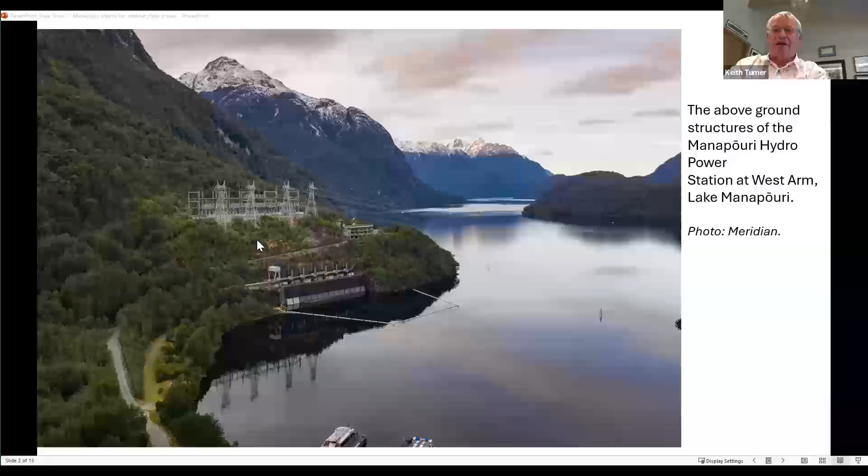Yeah, I've had a long association with Manapouri going right back to when I was 17. I took off from Rotorua to do a South Island trip in a 1948 Series E Morris 8, and luckily managed to cross the lake at Manapouri and visit the project under construction. One of the photos in the slide pack is a picture I took of the main intake structure being excavated.

That followed up with doing a practical period for my university degree at Canterbury in 1971-72, just after the final three machines were commissioned. The station was commissioned in two stages: Bechtel did the first four, and the second three were installed and commissioned by Wilkinson Davies. That was the time when the tunnel performance was discovered to be underperforming.

We couldn't run the station at its expected full load of 720 megawatts because the tailwater level rose too high for the anticipated back surge that might arise from a total station disconnect. So I was lucky to be there when Professor John Undrill was sent down to the station to revise all of the governor settings and establish the maximum rating for the station, which ultimately turned out to be 580 megawatts. I worked with John Undrill on those governor setting changes and got deeply involved in a lot of the calculations around the station performance.

Obviously at a tailwater level above 100 feet, the back surge was enough to flood the station. So this work was pretty important.

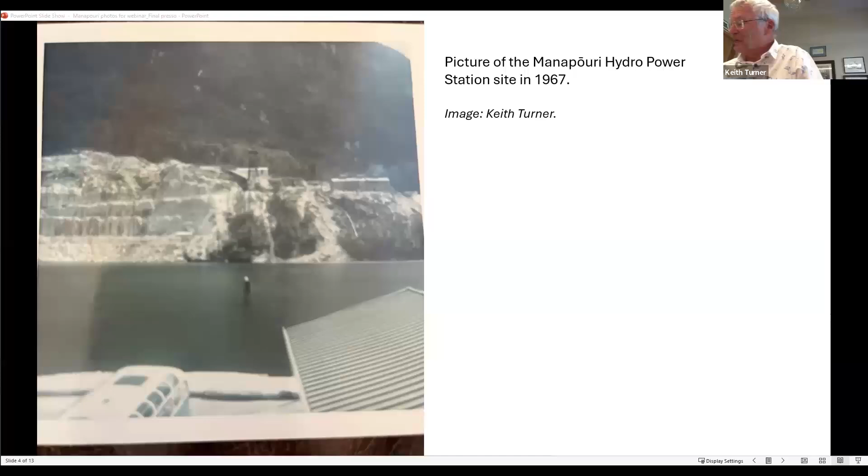In the end, I think it cost Meridian about $240 million against a contract sum of about $220 million. But I do know that the Fletcher-Dillingham-Ilbau consortium suffered a significant high cost from that project as well.

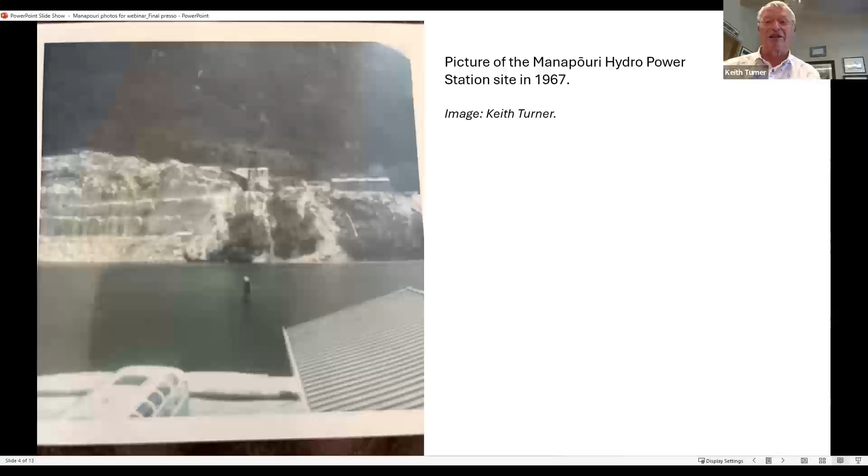We commissioned it in 2003, I think was the date. The picture in the pack of the TBM breaking through was a fantastic moment - I managed to be there, standing right beside the photographer when that photo was taken. It was great jubilation for the team to bring the project home.

And of course, that project, in its early days, because of the slow progress, we were thinking of abandoning it.

When we finished, that project was of enormous value to the power station and lifted its rating to above 800 megawatts. I'll let you into a wee secret and then I'll finish. Subsequent to the drilling of that second tunnel, we systematically went through and refurbished the generators and the turbines. The turbines were replaced by Hitachi back-angled intake runners.

A fantastic runner, very, very much quieter than the old Canadian runners that were there, but capable of 145 megawatts. So I said to my team before I finished at Meridian, that station must be capable of 1,000 megawatts. So I believe we actually got it up over 1,000 megawatts on a day when we had a very low spring tide, a very high lake, and we obtained a special discharge consent from Southland District Council for a period of 1 day. And I do believe that station got up over 1,000 megawatts for a brief period of 10 minutes.

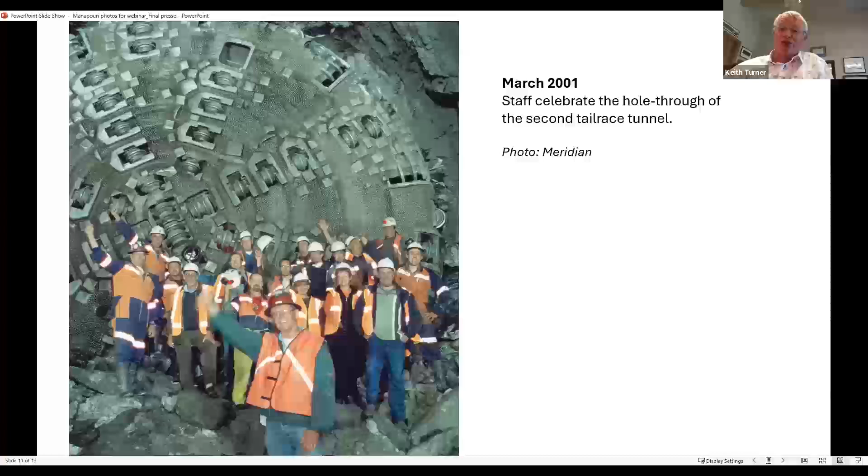To finish on real history, that project was originally conceived by a bunch of public works surveyors who were sent around the country in the late 1800s. So 1896, 97, 98 was one survey program, a second survey program in 1903-05. That scheme was observed and identified by those surveyors way back that far. So it took 70 years to bring that dream alive, but it has been a fantastic workhorse.

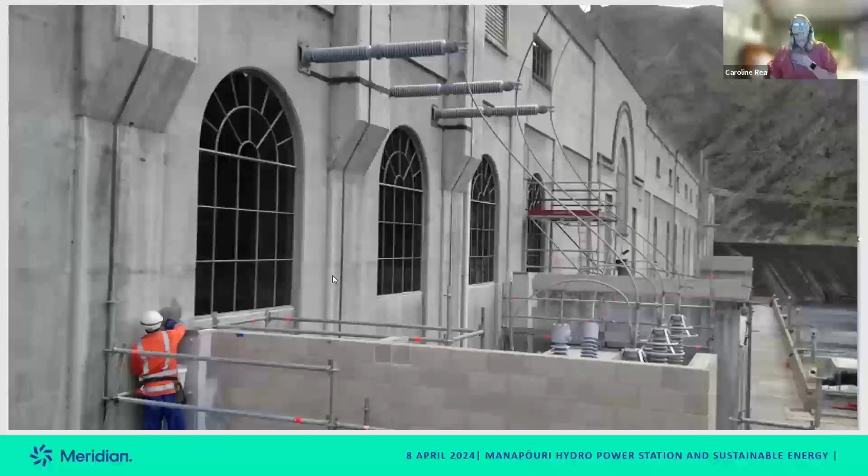I mitigated erosion of the sluice pier and tail race below the substation, improved fire protection around the transformers, enhanced uplift drainage under the dam, strengthened the retaining wall on the true left of the dam, and permanently removed the auxiliary generators.

One of my other little projects was to upgrade our beautiful wood-lined lift in the station. I then moved on to managing the refurbishment of hydro generating units at Ōhau Power Station, which kept me busy for another 3 years.

In 2022, Meridian set an ambitious target of 7 and 7 - one new generation project approved for construction every year for 7 years. In order to achieve this, Meridian decided to re-establish a renewable construction team, and I took the opportunity and joined the team as the civil engineering manager.

Our team now basically takes projects that have been secured and consented by our development team and takes them through detailed design and construction.

Meridian currently has 2 sites under construction: the 176 megawatt Harapaki wind farm in the Hawke's Bay. 3 of the 6 strings of turbines have been commissioned, and the remaining 3 strings are being progressively commissioned over the coming months. I just had to include that one - it was quite a pretty photo, I thought.

We are also building the first grid-scale battery storage system, or BESS, in Ruakaka, south of Whangarei, just down the road from the old Marsden Point refinery. This will be a 200 megawatt hour battery, consisting of 80 batteries housed in 20-foot shipping containers, and 20 power conversion systems.

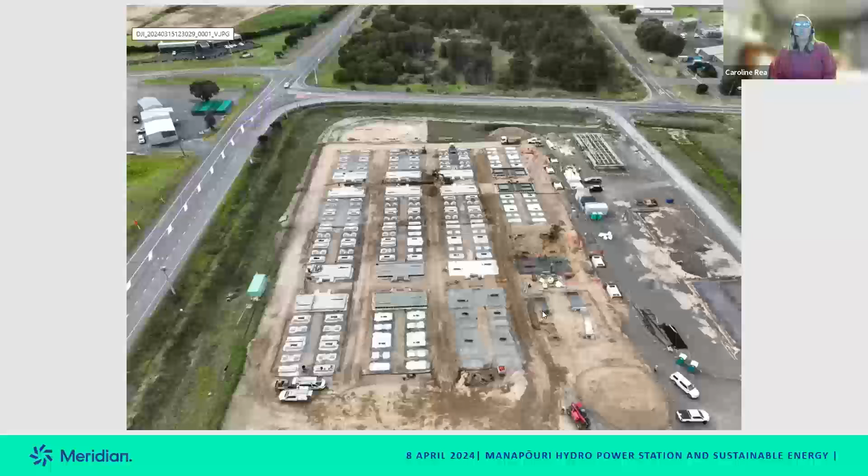Now the project is well under construction, as you can see in this photo, and the first of our shipping containers have arrived in the country.

We're also working on our first solar farm, which is adjacent to the BESS site, and this is going through resource consent. But my other major project I'm working on at the moment is the Te Rere Hau wind farm.

Meridian are partnering with New Zealand Wind Farms, who own the existing Te Rere Hau site, to extend and repower the site. There are currently 97 two-bladed wind turbines on the site, and we're looking at replacing them with 39 bigger turbines over a larger area.

The output of the new site will be 6 to 7 times the output of the original wind farm. I'm leading the civil design for this project, and while you may think redeveloping a wind farm would be straightforward, the size, weight, transport and craneage requirements of the latest turbines are very strict and require major redesign of all the existing infrastructure.

So that's just a wee bit about me and what Meridian's up to at the moment.

Great, thank you very much, Caroline. I think there was a question here from Mark, and maybe that's a good place to start, because he wanted to go a little bit slower through those photos and slides. Keith, maybe if Jordan can put those slides up, just to give a bit of a description of each of those photos and so on, would be awesome.

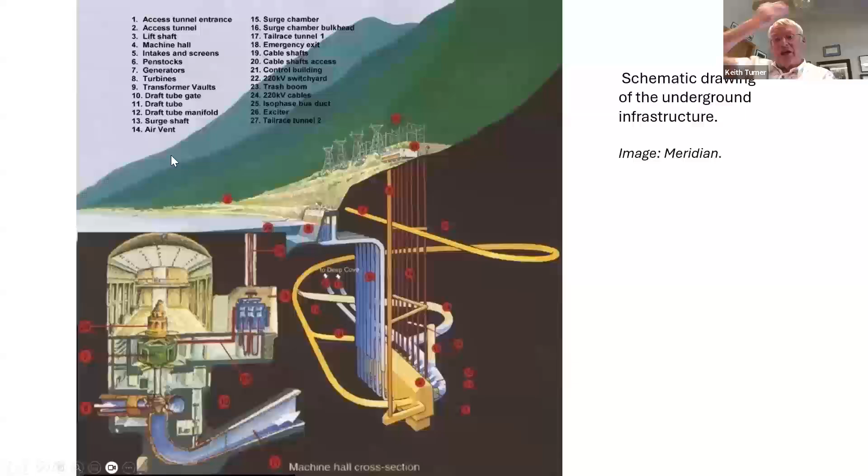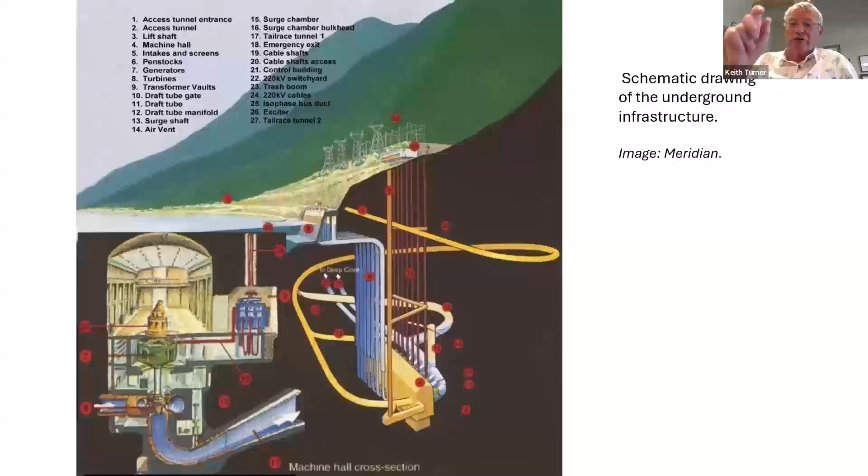Next slide, a schematic of the station, about a 700-foot drop from the lake down to the powerhouse. The powerhouse is a big cavern accessed by a spiral roadway, and you can see the surge chamber that comes off the manifold. The manifold's on the right-hand side of the powerhouse, and the surge chamber comes back up to that spiral access way. That was the critical parameter that governed the maximum output of the station when the tunnel was underperforming. The manifold begins the run right through to Deep Cove, about 10 kilometres. There are 7 machines, 7 penstocks, and all the machinery is down in the powerhouse itself.

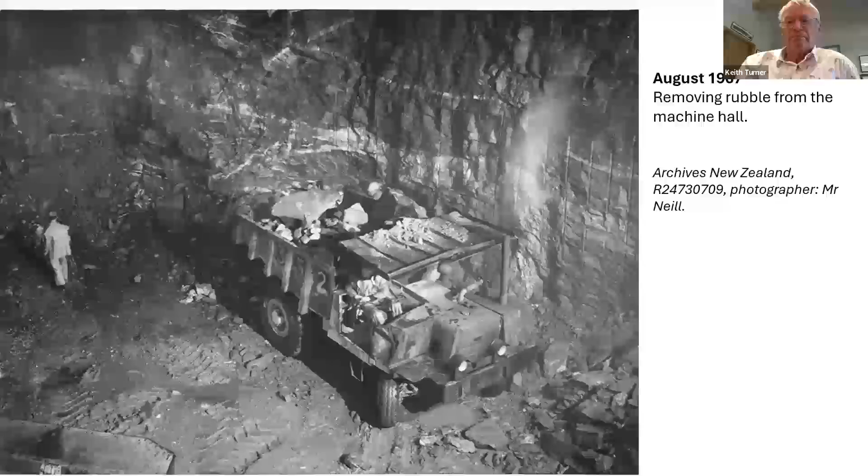A large truck receiving rock blasted out of the excavation face of the powerhouse. Those trucks had to drive up the spiral access way. They went up on the right-hand side, so the driver was able to stay close to the wall of the access and pass another truck coming the other way. So the access was the first excavation to get down to the powerhouse.

So this is the tunnel. As I indicated, the tunnel was lined with a thin concrete lining. That was simply because it was constructed by drill and blast, and the residue from drill and blast was too rough to leave exposed to the water—the losses would be too high. So a thin concrete lining was cast over that rough rock finish, simply to make it hydraulically smooth. This was the problem that ultimately led to the second tunnel.

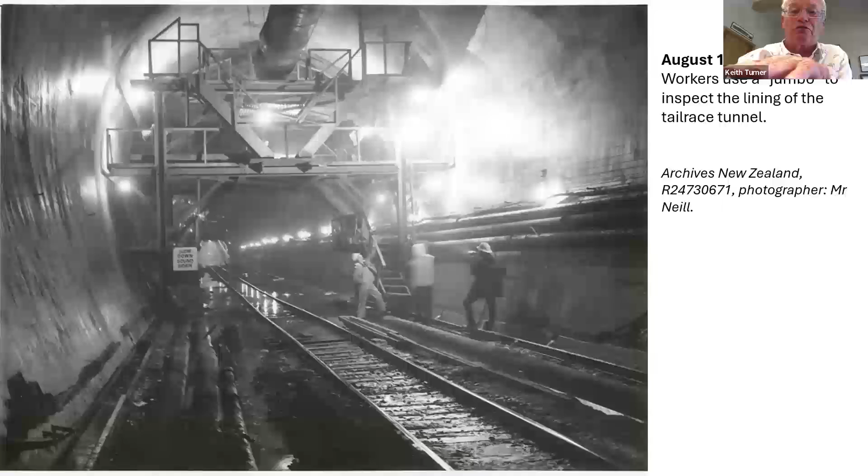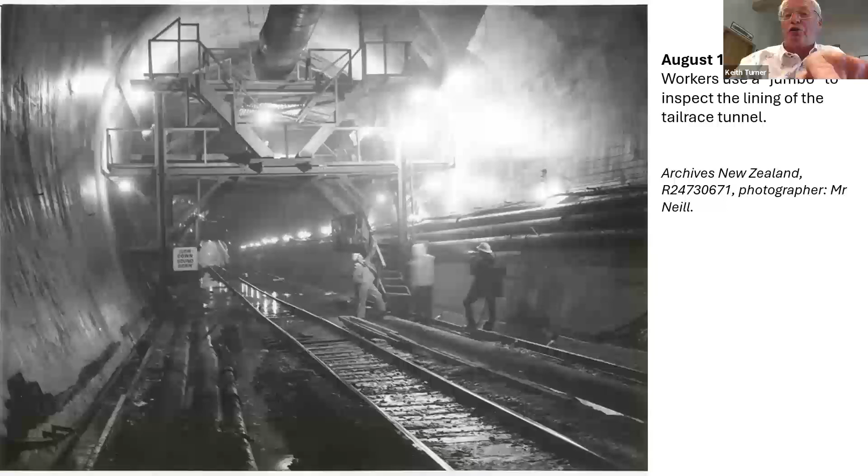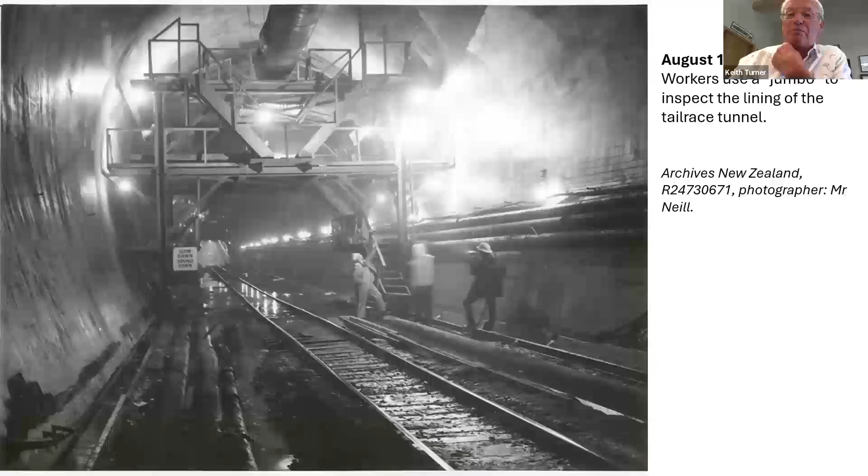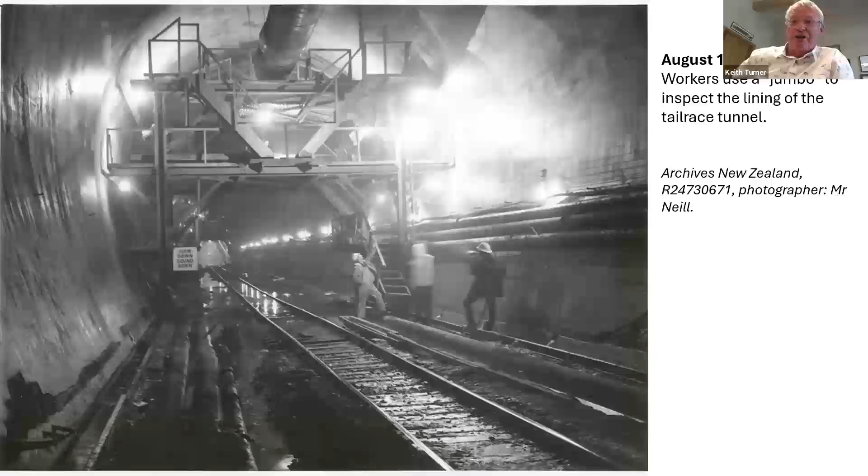The slip form that goes right around was hydraulically vibrated as the concrete was poured. It brought the cement to the surface, as you do when floating off a concrete slab. That high cement-rich surface is what got eroded by the acidic water of Lake Manapouri, acidic because it passes through a lot of rotted vegetation matter. When we measured that tunnel surface, the aggregate exposure was converted to a roughness figure. We took that roughness to a Brazilian hydraulics expert, who confirmed calculations I'd done myself, that the increased roughness was enough to raise the drag from what should have been 30 feet of operating head up to 100 feet of operating head. So that was the fundamental reason for a second tunnel.

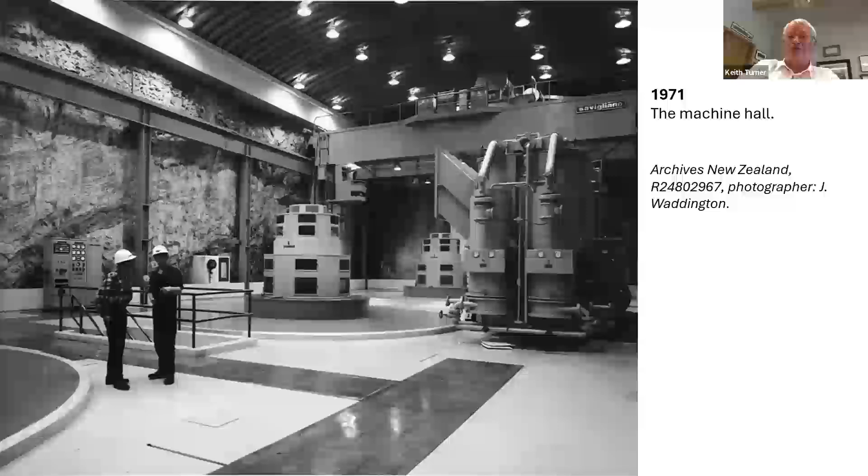Keith, you mentioned on the one slide there the Save Manapouri campaign, now more than 50 years ago. How do you think that changed the way we as engineers think about our roles and responsibilities as professionals?

I think it was a real milestone or a litmus moment. I've been around since 1950, and I've always had a deep interest in hydro. In the early 50s, hydro was seen as the cheapest source of electricity for the country, and the rate of growth in electricity was north of 8% per annum. The country simply could not build projects fast enough. In a way, the Ministry of Works in those 50s and 60s era had enormous power. There was very little debate about the environmental consequence of what the ministry did.

The legislation governing permissions was quite fragmented. A lot of it was administered by the Ministry of Works itself. So there was a halcyon period of build as hard and as fast as you possibly could. There were hydro campaigns in both the North Island and the South Island to do that.